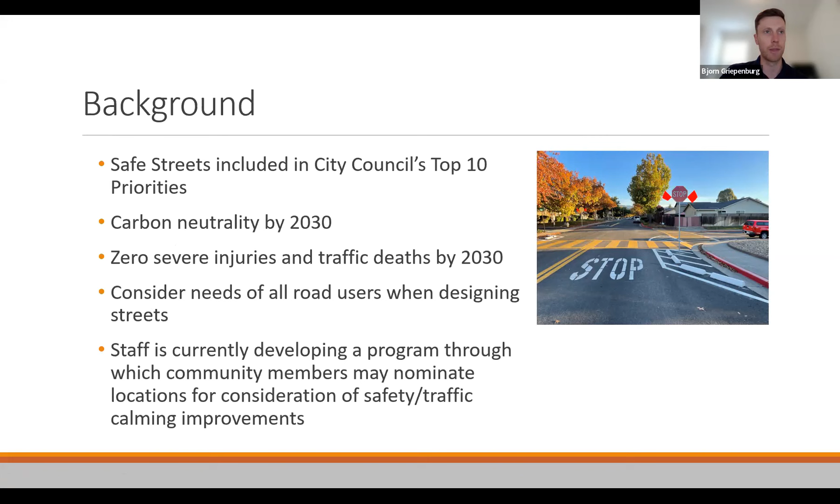So now about Windsor Drive. Windsor Drive sees about 1,700 vehicles per day on an average weekday while school is in session. It has a posted speed limit of 30 miles an hour. We've looked at the collision history dating back to 2011, and it does have a relatively low collision rate. Almost all collisions that have happened on Windsor Drive, at least those reported, have been solo crashes involving drivers running into parked cars or curbs or other roadway features. And as I'm sure you're all aware, especially living out on or near Windsor Drive, there are no marked crosswalks along the entirety of the corridor, something we would like to change.

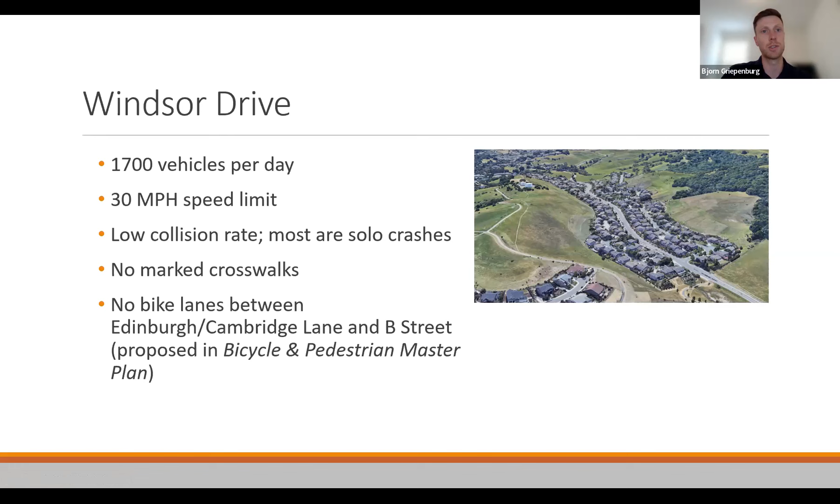There are also no bike lanes through Victoria. Currently the bike lanes run from B Street to the eastern edge of Victoria, and from the western edge of Victoria onward. But as soon as they hit Victoria, the bike lanes abruptly end. Windsor Drive is proposed for bike lanes in our bicycle and pedestrian master plan, which was adopted in 2008.

So what we know, we collected some speed data at this intersection and also traffic volume data. There's a 30-mile-an-hour posted speed limit. Some of the feedback we've heard from the neighborhood is that the crossing conditions are challenging here, especially for people on foot. We've also heard reports of speeding, which make that crossing condition more difficult and potentially dangerous.

We did look early on at whether this location met our requirements or criteria for an all-way stop condition, where Windsor Drive would have stop signs as well as the side streets. Unfortunately, it did not meet the all-way stop criteria, which takes into consideration collisions, speed, and volume. But as we'll share shortly, we've come up with an alternative design to an all-way stop condition that we think will be very effective in addressing these concerns.

The average speeds are somewhat close to the posted speed limit. So a little bit slower entering Victoria, coming uphill, just below the posted speed limit at about 29 miles per hour. Leaving Victoria, the speeds are higher, so you can see the average speed is over the posted speed limit at 31.5 miles per hour.

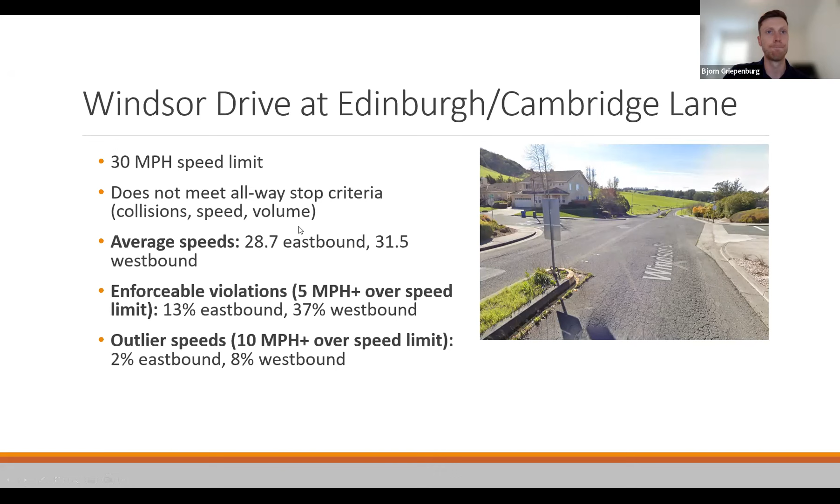So the goals of our proposed designs were to slow vehicle speeds, facilitate safe pedestrian crossings, create a more comfortable bicycling experience, convey safe roadway operations to all road users, and importantly, we're going to be using what we call the quick build method, which involves installing signage and roadway markings that can then be adjusted pending feedback we receive and evaluation we do after implementation to ensure future enhancements. All of these goals are based on the feedback we received from the neighborhood, our own field observations, the speed data we collected, and also those overarching city policies and goals related to active transportation that I touched on earlier.

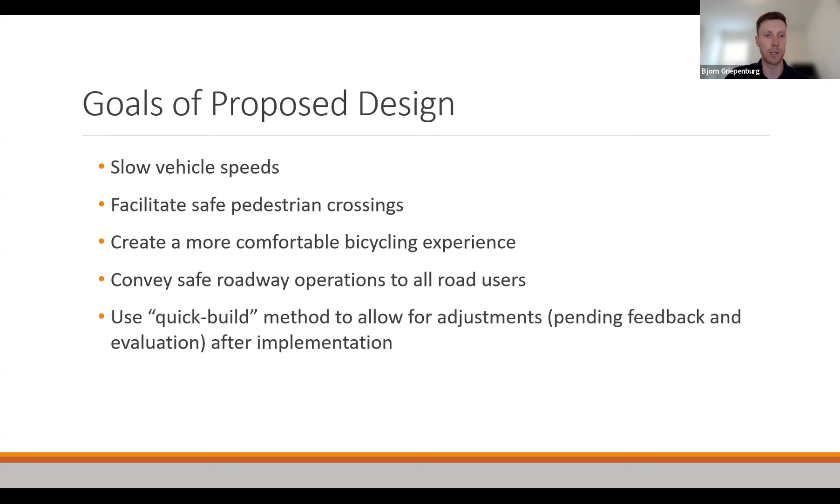So very excited to just kind of walk you through some of the proposed design elements. There are 2 different slides showing the design, so you're not going to see it all captured on one slide. But we'll start with the proposed crosswalk.

So we did look at both sides of this intersection, looked carefully at which side we thought could better accommodate a crosswalk. We ended up on the eastern leg of the intersection, because the curb ramps are lined up much better than on the other side. They're slightly skewed there, and you also have a much shorter distance here between the two sides of the street than you do on the other side. You can't see it here, but on the other side you have that parking bay, so it's a little bit wider and at a skewed angle. So this was definitely the better side of the street to install a new crosswalk.

We have what I think is probably the next best element that we're including, which is an extension of the concrete median. The concrete median actually ends about 25 feet short of where we would install the crosswalk. So we would stripe that, use paint to basically extend the median out towards the crosswalk, and even extend a little bit beyond it. Within that striped area, we would include flexible posts that have a pretty thick diameter. They look a lot sturdier and more intimidating than your standard plastic post you see on most city streets. This will be one of the first projects we're doing in Petaluma using these, called K71 posts, and we're excited to introduce those here.

Actually everything else is on the next slide. So what the next slide shows is that same painted median on the western leg of the intersection. Although there is no marked crosswalk there, legally as a pedestrian you are entitled to cross the street there on that side of the intersection, and you could informally use that as a pedestrian refuge.

Excuse me Bjorn, could you point out, I'm a little confused where this is exactly? Sorry, I've been pointing on the wrong screen. Thanks Jessica - oh that's okay. Just orient me to the neighborhood, like if I'm coming from Western, where? Western is to the left of your screen.

So this is now approaching the Edinburgh-Cambridge intersection here on the top. I was pointing out the painted median, which we would have on both sides of the intersection. And again, although we are not marking this as a crosswalk, legally as a pedestrian you are allowed to cross here.

Same design, same plastic posts included in that median. We also have what are called yield teeth on both sides of the intersection, showing drivers where they are expected to stop to yield to pedestrians waiting to cross. This provides a little advance warning, along with signs next to those yield teeth that say 'yield here to pedestrian' on both sides of the intersection.

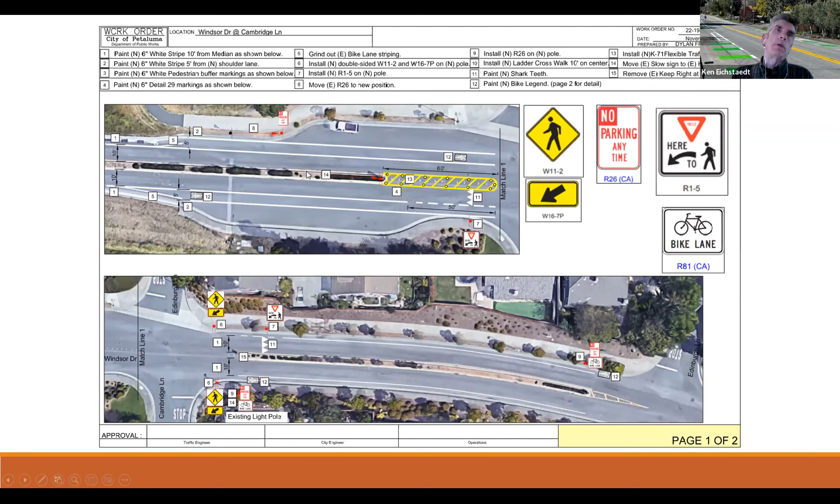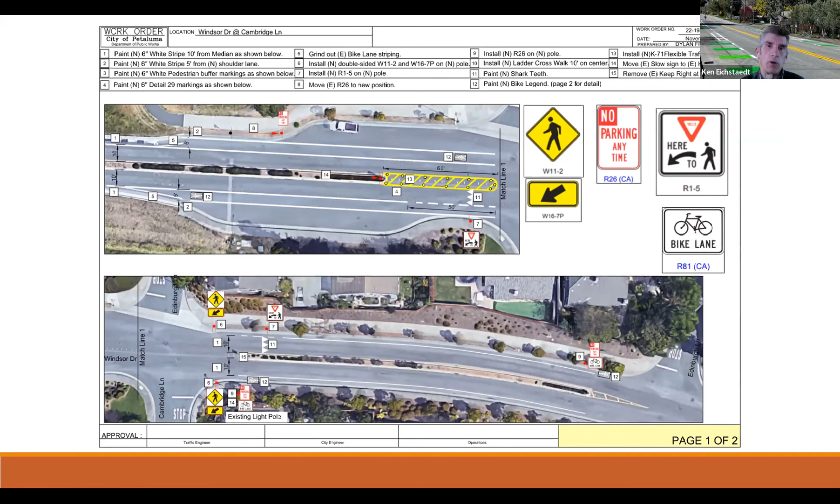Yeah, I'll just say 10-foot lanes, 10 and 10.5-foot lanes, any of that narrowing just gives drivers more of a shy distance and tends to slow traffic down. I've talked to the city of Santa Rosa, who's done it on similar roads - Yalupa, Hoen, Summerfield - and it's worked. It's a known means to be able to slow traffic.

I also wanted to mention the curb returns, trying to give the pedestrian safer access to crossing the road. By narrowing the lanes, they have less distance that they're actually in the travel lane, and it gives them more visibility. Those are a real useful tool that have been found to give increased pedestrian safety.

That's a really good point, Ken. Another effect of adding these bike lanes is we are pushing vehicle traffic closer to the middle of the roadway, which means as a pedestrian crossing the street you'd have a shorter distance in which you'd be exposed to vehicle traffic. Good point, Ken.

Thanks. I can't think of anything else to point out on either of these slides, but we can definitely refer back to these in the questions and comments portion. So I'll just move on quickly and about ready to wrap up here.

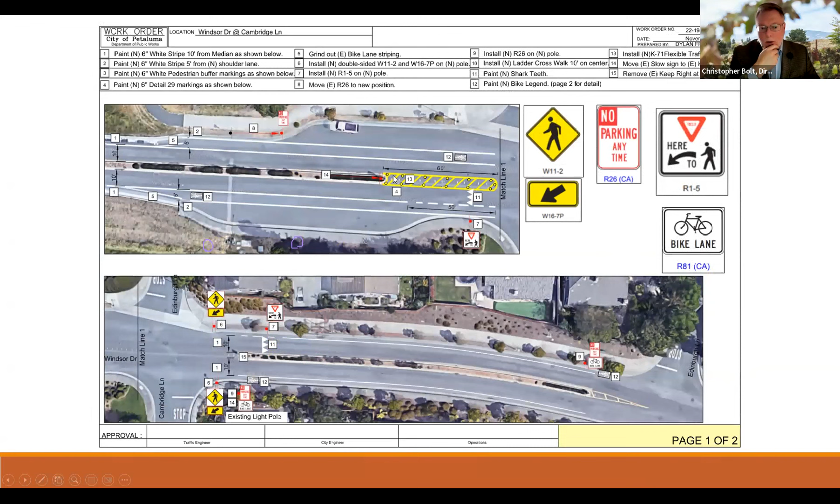They have a psychological effect on drivers to crowd what is otherwise a wide open area, much like the photo we just explained.

So you're seeing a set - this painted median is 60 feet long, so you're seeing a set of 2 about every 10 feet, and then the 3 out at the front, sort of marking the edge of the median.

So between having those and the bike lanes, you avoid what we call the runway effect - the wide open feeling where a driver feels safe to just speed through. This is a crowding effect, which psychologically should, and often does, studies show, cause drivers to be more cautious and slow.

I just want to emphasize one point before we go to the next question - we do plan to, we have in the budget proposed for our council, the purchase of some special software and camera systems that will do traffic counts of pedestrians, bicyclists, and vehicles over an extended period of time using intermittent photos and motion detectors, so that it's much different than having folks out there with clipboards counting. We can actually, over a week or 2 at various times of year, get pretty high resolution traffic data to help improve safety. So our hope is, after we get these installations finished, to take a traffic count again and compare it with our results that we already have using this new technology.

Victoria. And then in the other direction, there's another one somewhere else on the corridor, and we could also look at doing the same on this side, although there is a lot of signage at this intersection, and there's always a balancing act to play with installing signage that is going to get noticed by drivers and really fulfill its intended purpose.

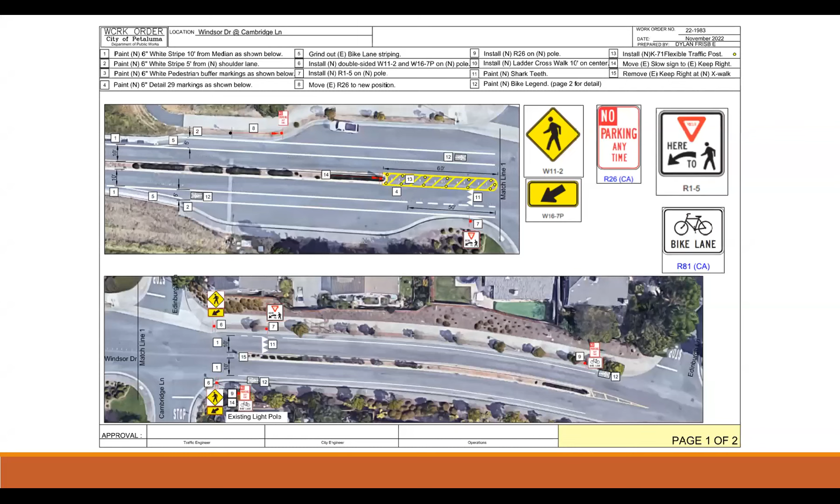So I might have missed this, and I apologize to folks on the call, but you'll notice in this diagram right here, the crosswalk painted in, I assume, white cuts through the yellow median. This doesn't appear on the second diagram on page 1.

Is the proposed design to include this thatched crosswalk or not? Yeah, the crosswalk is included. It was left off of the other page, I actually don't know why, but this will be the page that informs the crosswalk installation. Okay, perfect, just to zoom in, since it's a more detailed design. Yeah, Bjorn, I think the other page was meant to emphasize signage, and this is a zoomed in of some of the markings there. If you flip. Yeah, no worries. I just wanted to understand if that crosswalk was going to be part of the design.

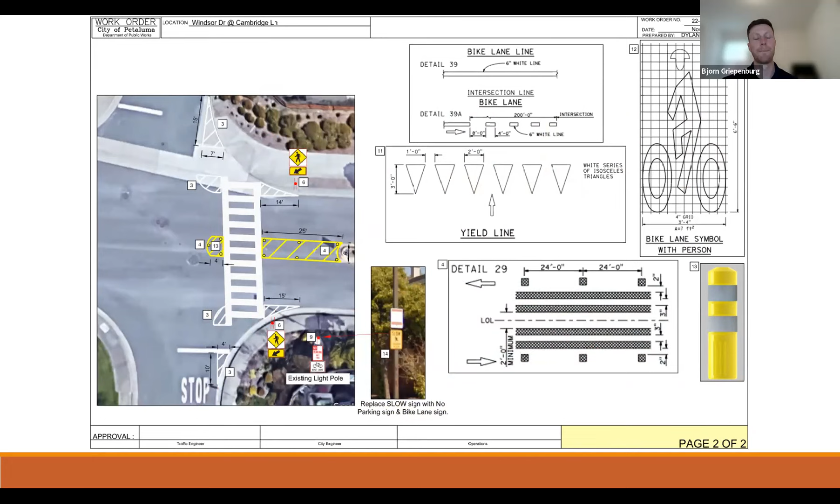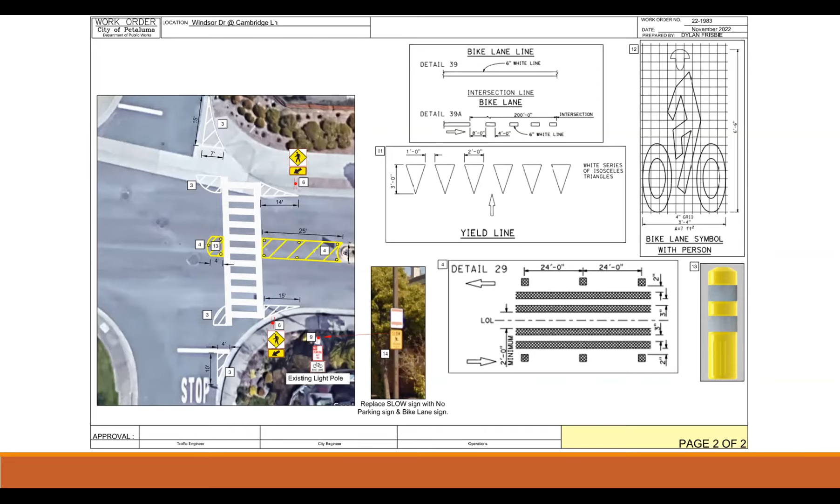So that answers the question. Second is, and I understand that speed and cost are factors in moving forward with the extension of this median, but was there any analysis done to determine if just extending the cement median as was currently designed would have been either more cost effective or more effective in general? And I say that in part because the K71s to me look a little bit like I'm driving through a construction zone, and aesthetically to me less pleasing than if it was just an extension of the median.

Yeah, that's a great question. So with these, again, I call this a quick build project. Those are projects that entail signage and roadway markings and these surface mounted elements like those plastic delineators. The goal with those quick build projects is that they're more cost effective. They require a lot less engineering and design, and they can be implemented and adjusted in a relatively short time frame. With concrete work, that definitely brings the cost up quite a bit.

Adds, there's definitely more civil engineering required. Our approach as a city is generally to try to incorporate these quick build improvements, and then potentially in the future come back and start filling in some of the painted spaces with concrete work. But of course that all requires careful consideration of funding availability and other priorities. Anyone else on the team want to touch on sort of the quick build to concrete?